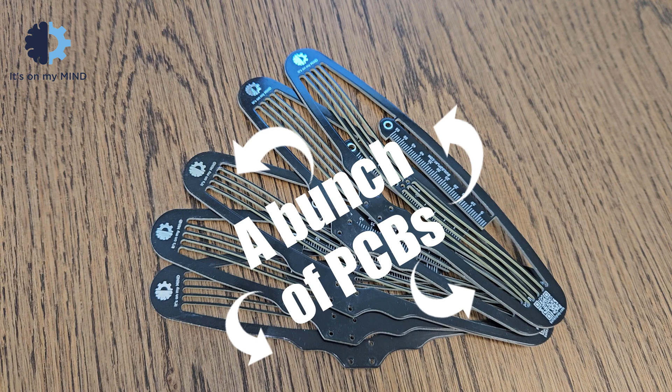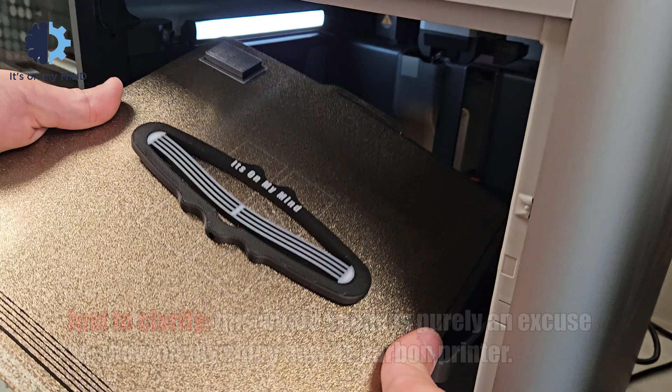2 months ago, I showed you a printed compliant mechanism crossbow. That video got a lot of love, and I wanted to explore if I could take that design further, maybe even make it suitable for mass production.

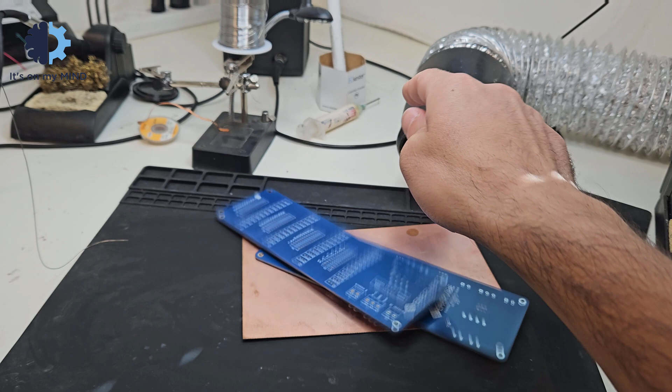So I decided to try manufacturing it with PCB. PCB is a precise and durable material widely used in manufacturing, and it is typically made from fiberglass reinforced with epoxy resin and conductive copper layers. I wanted to see if a compliant mechanism like this crossbow could be effectively created using a printed circuit board.

I started by refining the design in SolidWorks and then moved to KiCad to lay out the PCB. It's a great free open source software for editing circuit boards. The process came with its own set of challenges.

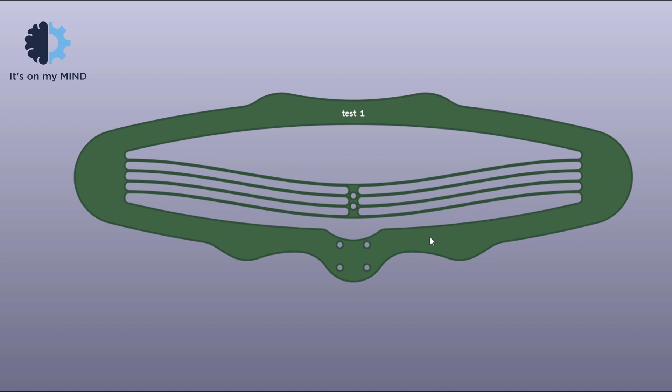The first version wasn't without its issues. I accidentally sent the files without the solder mask, which resulted in an exposed copper board with gold plating. It looked shiny but wasn't exactly what I intended. Also, it had thick walls, making it tough to compress the frame and release the buckled beam. Despite these issues, it was a great proof of concept for the thin arms.

I was worried the manufacturer wouldn't be able to create them. With the thick frame stubbornly resisting a good squeeze, I started my interrogation, cutting it down slice by slice until it finally gave in to the perfect fit.

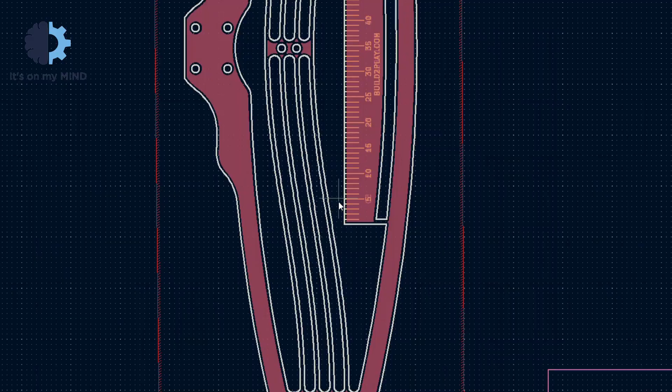After addressing those issues, I designed the second version. Just because I can, I decided to use some of the empty space to add a ruler for measuring bolt lengths. However, this addition unexpectedly increased the manufacturing cost as it was considered a separate design.

The crossbow works by compressing the two sides of the frame, releasing the stored energy in a buckled beam, and firing the projectile. Thinning the walls made this mechanism smoother and more manageable.

Here you can see how to measure regular screws and flathead screws with my unnecessary screw ruler that screwed the manufacturing cost. To complete the design, I needed a few minimal printed parts.

One part snaps onto the front of the bow to hold a toothpick or Q-tip in place, and another attaches to the buckled beam to push the projectile forward.

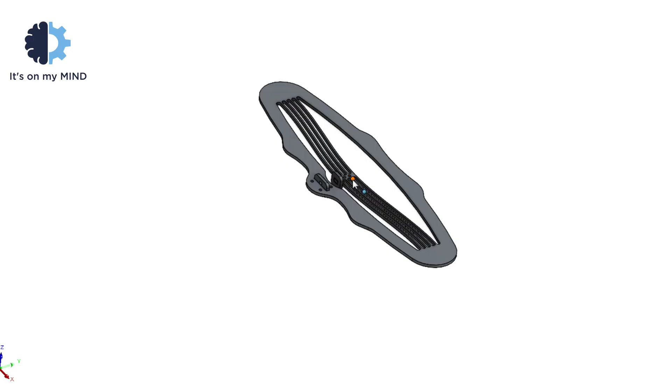These small parts are essential, but I know some of you might be thinking adding printed components could complicate mass production, and you're right. While PCB manufacturing is great for mass production, the inclusion of printed parts could be a limitation. I might need to explore other methods like injection molding to create these components in a more scalable way, or perhaps look into integrating additional PCB elements to replace the printed parts. These are considerations for future development.

So here we have it, a compliant mechanism crossbow made from PCB, functional, and a step closer to a mass-producible design. I made 50 units of the second version, so if there's enough demand, I'll manufacture more. There might be a link in the description where you can place an order.

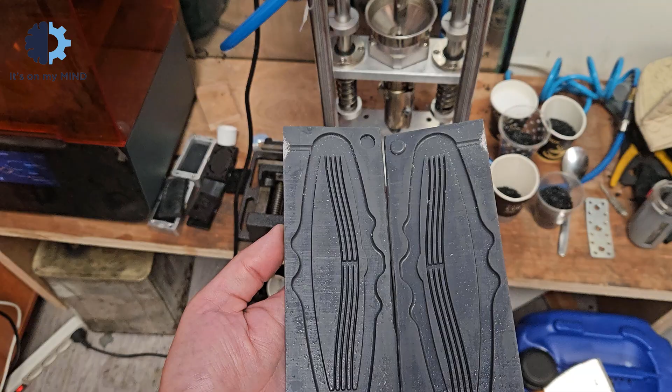This project has been a valuable experiment in exploring PCB manufacturing. I'm still looking for the best ways to make this design suitable for mass production, and I'd love to hear your thoughts, specifically on what manufacturing techniques to explore.